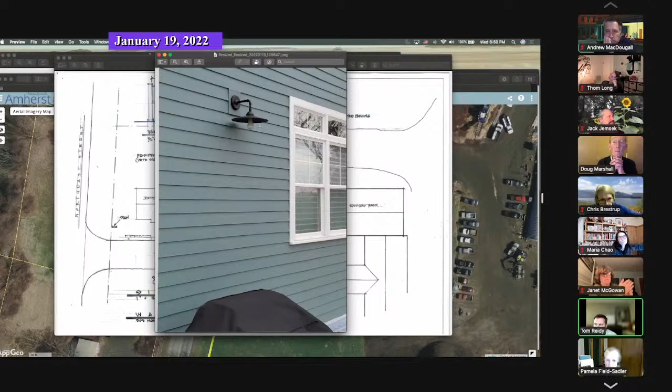Let me get to, so here's the floor plan.

Existing barn here. If you were at the site visit, you saw those barn doors. And so there's a question about, well, where is this going to start? And so it starts, there was a window on the barn. It'll start just to the right of that window or to the left of these barn doors.

They still utilize this barn, and so they would need to have access and be able to open those barn doors. The footprint, if you'll remember that L shape, you've got that entrance that we talked about here. That will be at grade, so it'll be accessible.

You've got the retail area here. You've got the coolers along this northerly side, the left side in the plan. You've got your checkout area here.

Stairs not accessible to the public because there's no public spaces. There's no public bathroom. So really the public is only going to have access to this area right in here. There's that porch. If you recall, you saw those steps with that porch light. There's the porch. There's a doorway into this open area with a hallway.

And then you've got 3 offices, 100 square feet each, to be used for the existing agricultural uses on the property.

So Wagner Wood obviously operates at this site. They also have an office in their house. They'd like to keep that office. Buzzy and Jamie have 5 kids.

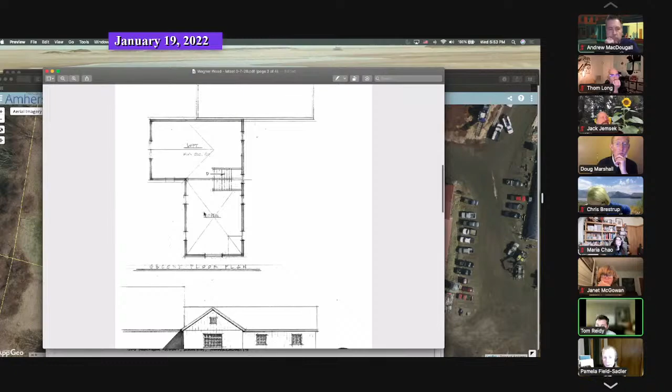You'll see the porch, you see the loft area, that second floor, which again is just going to be for storage. So this is just a second floor. It's open above, so it'll appear as a 2-story open space. When you're walking to the farm stand, you'll have the roof 2 stories above, and then that loft is over where the offices are. This is looking from the northerly side.

It's not shown, but there is that porch right over here. You see that the grade slopes off. Ultimately what we'll have is an access into the basement, because that's where the Wagners are going to store their freezers.

And I probably should say, because it's most important at least at this time, we'll comply with the bylaw, and we'd accept the condition that we comply with the language of the bylaw as it's written. The intent is to have 100% of the products from on site. So they raise cattle, and the idea would be to send that cattle out and then bring the cattle byproduct, the meat, back for sale at the farm stand.

They'd like the ability in the future maybe to get complementary produce that's not grown on site, but is from Massachusetts. So they'll comply with the bylaw, just so you know the intent right now is to just sell the wares from the farm at the site.

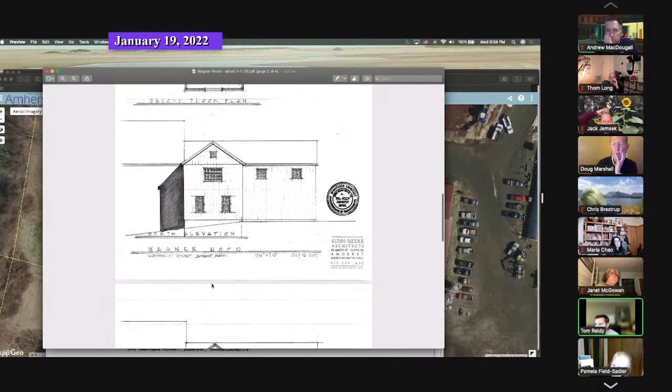Oh, there you go. There's the north elevation with that porch, which is the right way to look at it. And then you've got that south elevation. This is the existing barn.

Here's that other side of that entry, if you'll recall. And it's a 2-story in appearance from that side.

And then just to go back, the wood sign, Wagner's Farm Stand, right here, 4x2, so 8 square feet is what this would be, and it's proposed to be right here.

We're also thinking about putting a safety sign, caution pedestrian traffic, in about this area. We're happy to update the plans. And then I guess if that's deemed as exceeding the square footage for the signage, I'm not sure that safety signs are like traffic or informational signs are - I'd have to frankly look into it in the bylaw. Assuming it is, then we'd request a waiver from Article 8 for the ability to put in that additional safety sign. If it's not, then we'd just like to put in that safety sign.

There are trucks that travel through this path. Most of them are Wagner's trucks, or they're folks who come here often to pick up the mulch or to drop off other tree products. So a lot of the times it's people who know, and they'll certainly let people who are coming know, and let their drivers know there could be pedestrian traffic.

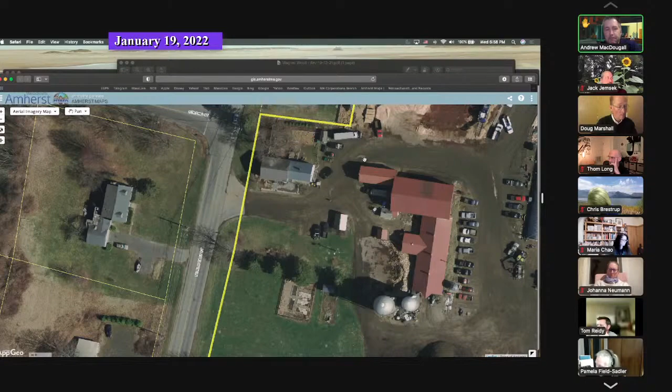We had some questions which were related to traffic flow. So we asked about how the large vehicles and trucks get through, who drives those trucks, and some general safety questions, which Tom alluded to in his presentation, that the truck deliveries are generally aware of the situation, given the fact that Buzzy and his family have 5 kids. Traffic moves through slowly, but they acknowledged that it would be useful to put up a sign, as Tom already alluded to. We did have some questions relative to ADA access.

So the existing kind of paved material, I can't remember what we decided to call it, whether or not that was going to be changed. It was shared with us that the surface would remain as it is. It's generally flat. The distance line from the ADA spot to the front entrance is generally level. As you saw in some of the elevation views, as you wrap around the north of the building, the elevation does drop, but they have acknowledged the need for ADA parking. There will be a designated spot, and also it was indicated that given the nature of the area, it's quite possible that somebody who has difficulty moving around might just park close to the building anyway, so they could get quick access.

The lights on the house were pointed out, and the motion sensor lights, and then there was also the indication that there will be some lights on that post that Tom just pointed to, and also that there would be coach lights on the side of the building as well. There's a couple existing structures, I think actually one existing temporary structure that's moved around, that's in kind of the shadow line of the barn there now, but I think that was about it.

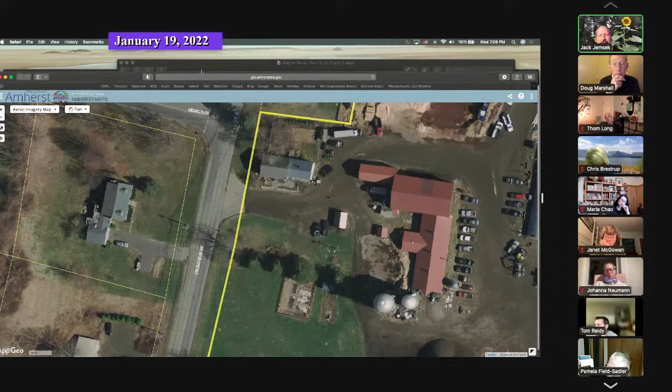I had about three things I wanted to talk about, but the ADA — people have asked a bunch of questions — but one thing I'm not clear on is the access to the building, because I know there's stairs. Is there a wheelchair accessible entrance to the building? Where is that?

Pull this back up, Jack, if you can see — I'll show you this. These are stairs over here, so that's not the public access point. If you follow it, it's in the southeasterly corner of the building — I'll go back to the site plan, or the aerial, really. So it's in this corner. All right, and so it'll be right over here.

So that's why when we talked about the accessible route, it's relatively flat, basically flat, from these parking spaces to have van access over to this corner. But what we just talked about with Janet was putting something right here, potentially an ADA parking space. This is where there's a bit of a slope, plus they need access to that barn, so this space probably makes the most sense. The entryway here will be at grade with the surrounding area.

Thank you, Tom. The second question is about the surface of the drive and parking, given the size of the trucks that come in and out. How often does Wagner have to resurface, bringing in additional milling material and planing and that sort of thing? Because I thought the trucks were pretty large there. It would tear up

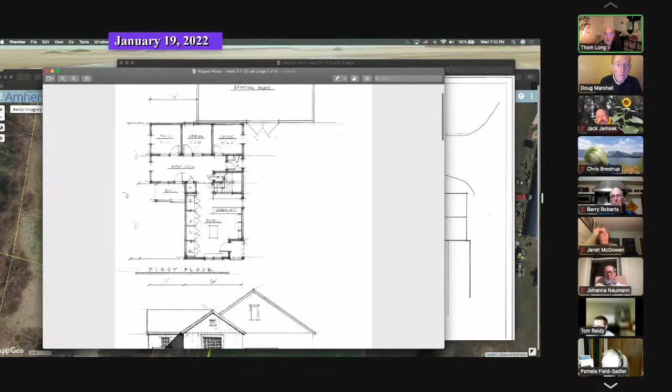And so, but if people are being employed there, don't they need to be accessible? You would need to hire for accessible people, or for people who need access, right? Yeah, and I don't even want to go down the road of thinking about discrimination and reasonable accommodations, et cetera.

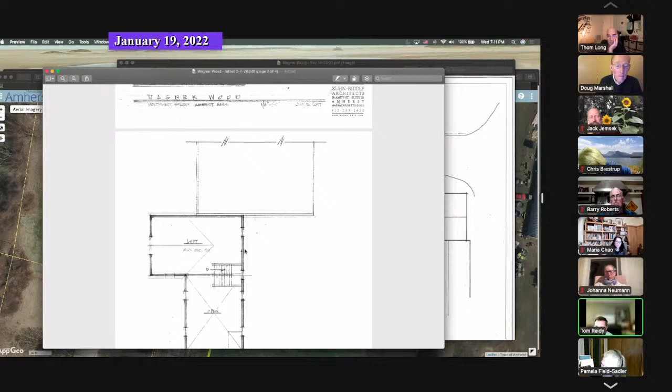There would be the ability to access these offices through this door. This second floor, as I understand it, is for storage. Again, not to go down that road, but I would imagine that any employee who is not able to go up to the second floor would not be required to. I don't know, Barry, if you've got this, but this is what our architect tells us as far as what the accessibility code requires. Sure, it was just a question and a thought. Thanks.

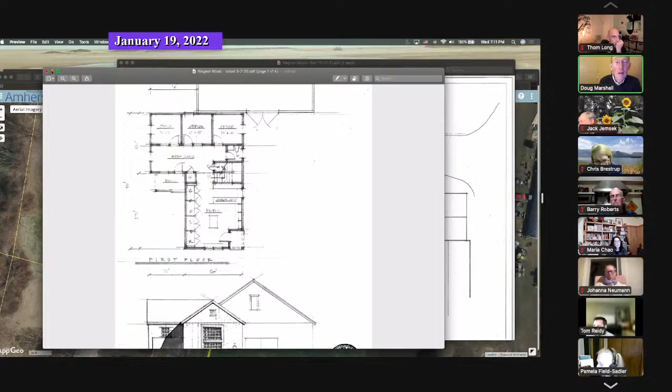All right, I guess I had a couple of questions. One is, and this is really I'm just curious, what Barry's role is in this. I understand, Tom, you're the legal counsel, and is Barry in partnership with the Wagners or something? I am not in partnership with the Wagners, I'm just helping facilitate the build and working with John Kuhn to design the project. Okay, thank you, middleman I guess.

And then I guess it was a question for Chris, how this commercial use fits in with the zoning of the farm, of the agricultural land. And by approving this, what happens if this grows and becomes successful and turns into something of the scale of the Atkins farm shop in South Amherst? You want me to answer that? Sure, yep.

So they need to adhere to the requirements of the Class 1 farm stand, which requires that 25% of the products they're selling be grown on the site, and that 50% be grown in Massachusetts. They can find other products that are compatible to fill up the rest. The building commissioner is going to ask for proof of what they're selling, and we'll be checking periodically to make sure they comply with those requirements.

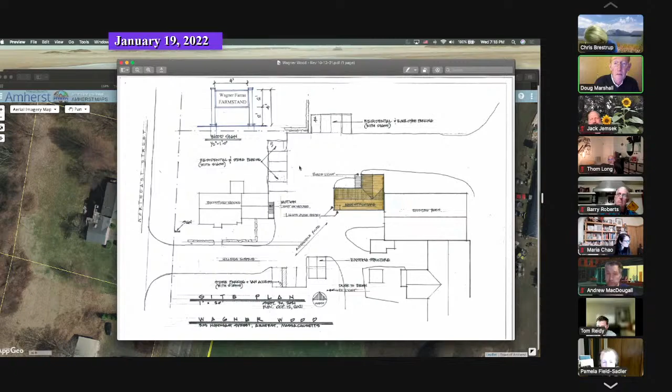Are there any more board comments or questions? At this time, I will ask for any public comments on this project. I guess I don't see any. Chris, I assume that abutters were notified that this hearing was going to be taking place? Yes, they were. Okay, so I don't see any public comments.

All right, any final comments from the board? Does anybody want to make a motion? Johanna, go ahead.

Well, I guess I'll just say it seems, you know, it's a huge property overall. The idea that they're going to start selling some of the meat that they produce locally on the farm just seems cool. It's consistent with the historic usage of that land and kind of making it possible for people who live in Amherst to be even more connected to the food and the farms that operate here. I recognize that's a little bit outside our job, which is to look at lighting and surfaces and structures, but overall, I think it has the potential to be a neat feature and addition to our community.

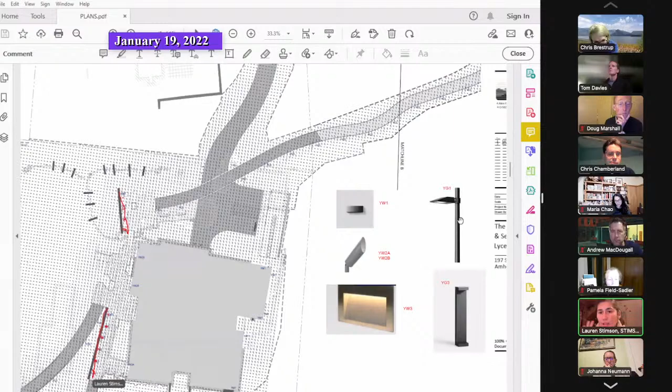And then there is a third type of lighting, which is wall lighting - flush mounted wall lighting. These are two seat walls that hold up the terrace at the edge of the building and define that front terrace, and those would be flush mounted wall lights. And then the fourth, or really fifth, type is coming off the building.

These are actually building mounted lights. The architect can talk about them further if there are questions.

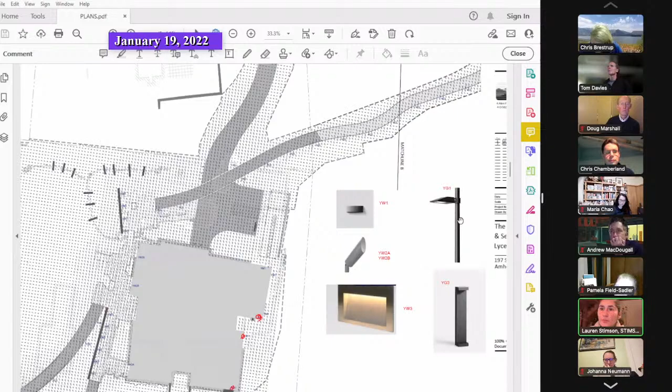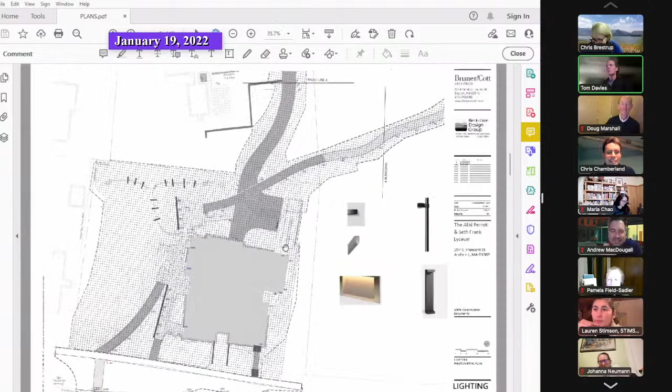Can I just add one thing before you zoom too far out? People probably know this, but all the notifications went out to the abutters and they all came to us because we are the abutters - we got a big pile of them. Presumably you didn't have any issues?

Looking at site utilities, we will be replacing the existing utility connections onto the site as they're sized for a single family home and need to be increased. Water service will come directly off South Pleasant Street. Sanitary service will discharge to Walnut Street, then run south through new sewer. Site electrical and communications will come off Woodside, underground, coming off a pole, and then underground along this driveway up to the main site. There's no gas - the college is moving away from fossil fuels everywhere, so this is pretty much an all-electric building. Those are the connections we have to deal with.

Then there's the stormwater management overall on the Lyceum site. The drainage from the roof of the building and some of these hard surfaces is a combination of piped and overland flow, which we worked closely with Stimson to create a series of bioswales and rain gardens. There's a lot of slope to deal with on this site, especially once we've created a flattened terrace area. So there's going to be a series of logs designed almost as steps to bring this water down on the surface, allowing little pools for settling, temperature attenuation, and those sorts of things as we exit the site. If you're up for a walk on a rainy day, it should actually be a nice dynamic site feature.

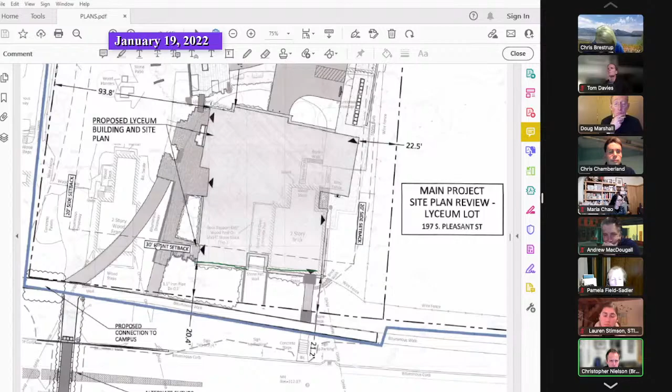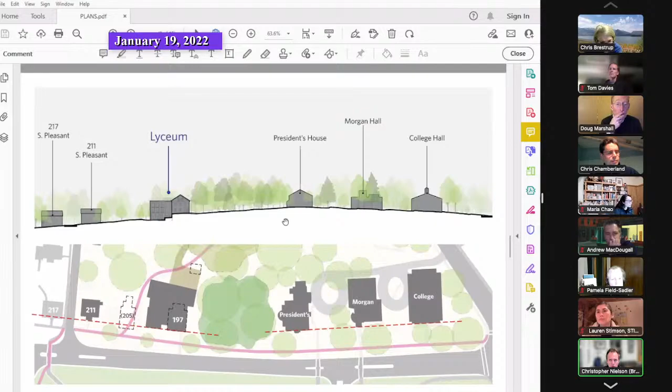Down below, we look in plan. We did a study to look at what is the actual setback of these buildings and where could we be most respectful of the neighborhood in our addition to 197 South Pleasant Street. Chris, there's one more image. And so in the end, what we think we've come up with is a building that reflects the scale of the existing building and a bit of the rhythm of the windows, while still maintaining an institutional academic building for the college.

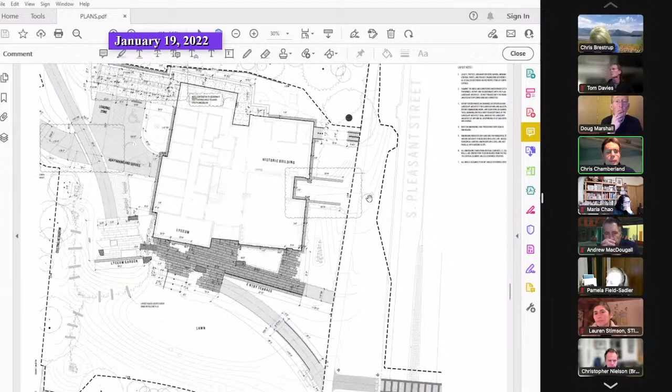Thanks, Chris. Sorry, I'm going to have to jump back a little bit because the last part I want to talk about is the Newport House lot over here. We touched on most of the main points here, but just sort of pause on this as a separate site plan review. This is an existing nonprofit educational use. There is no change proposed to that use.

Previously, this building had some classroom and meeting space. At present, it's entirely a dorm. The proposed work includes stormwater management, lighting, as well as a small amount of planting.

The lighting is consistent with the overall lighting plan which Lauren stepped you through. There is a proposal to add a small amount of planting at this intersection of the woodland path with the parking lot, which also highlights this ADA crossing as we get from the path and the ADA parking spaces into the building.

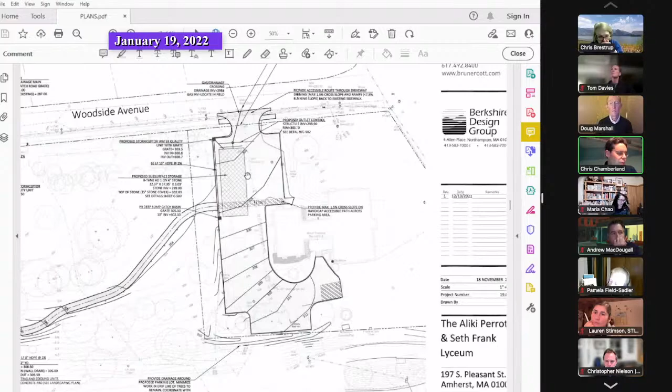Questions came up about the traffic associated with this parking lot. What we want to highlight is that as part of the overall campus parking supply, these are spaces typically used with turnover of once or twice a day as people arrive to campus and then circulate around campus primarily as pedestrians before leaving at a single time. So those are the key points we wanted to highlight. I'll keep these plans up, but we're more than happy to address any questions you may have.

All right, thank you, Chris, and your entire team. That was a nice presentation.

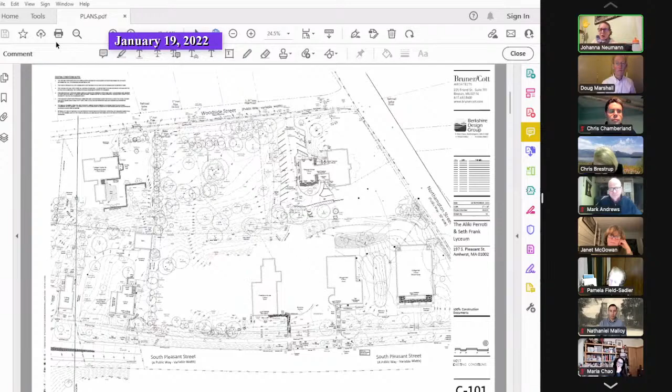We did spend a little bit of time talking about the different grades, downhill, looking over at the Amherst College campus and the connection with footpaths there. It was noted that the new woodland path would have undulations, but overall doesn't have quite the same challenges with grade as some of the more paths towards South Pleasant Street.

We also talked a bit about the building which is planned to be used as an office along Walnut Avenue, and that would just return to being a dorm. So it wouldn't be really disruptive to anybody there with the construction and things like that. It was kind of a short visit. We were really cold.

Okay, great. I'll assume, Andrew, you don't want to add anything? No, I was going to just mention the staging of that house. I think that was something addressed in the plan as well, whether they'd be able to use that as an office instead of having to bring a trailer on.

I think, Janet, you had asked about geothermal, in terms of whether that would be considered at the site, and it was shared that was not in consideration. But otherwise, I think it was a great summary, and it was cold. It was really cold.

All right, so board members, any questions for our team from Amherst College? Maria.

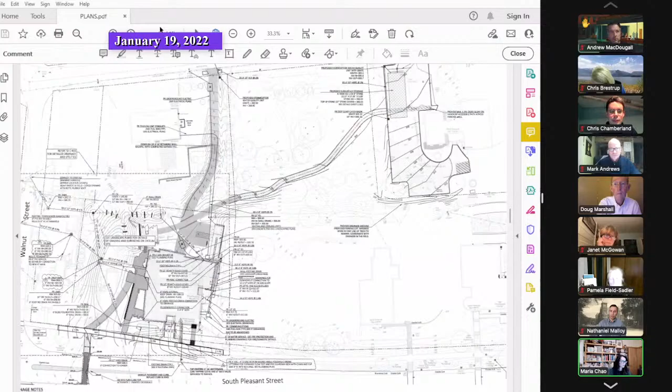I think the setbacks are not an issue in my mind, that it really fits with the scale of the street and adjacent buildings. The 3D renderings, not that we'd ever be 80 feet up in the sky, but I think it's really lovely the way it respects the adjacent building.

I think also that the parking is not an issue in my mind. Just disclosure, my husband works for the college, and the staff and faculty park in one spot, and then it's a walking campus. They walk into town for coffee, they walk everywhere. So the parking in my mind is not like you need parking next to every building you're going to use. They literally walk for miles all over the place daily. So I think that's the way this building will function as well.

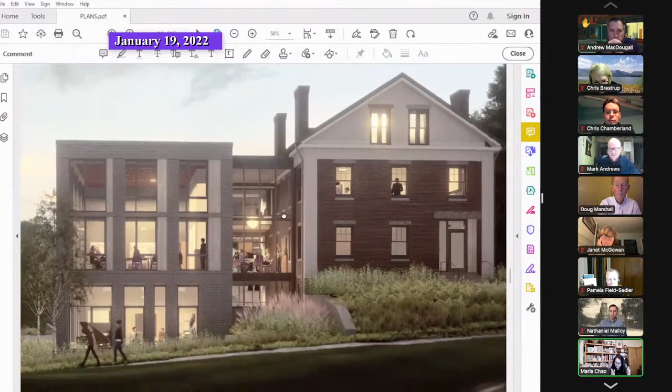And I think the entries, it's hard to see from the rendering, how clear the entries will be, but I think in reality it'll be obvious with that glassy centerpiece. But some of the landscape, it's kind of hard to see exactly where people come into this corner of the building. But I think once the reality of it is in the space, it'll be clear where the circulation is.

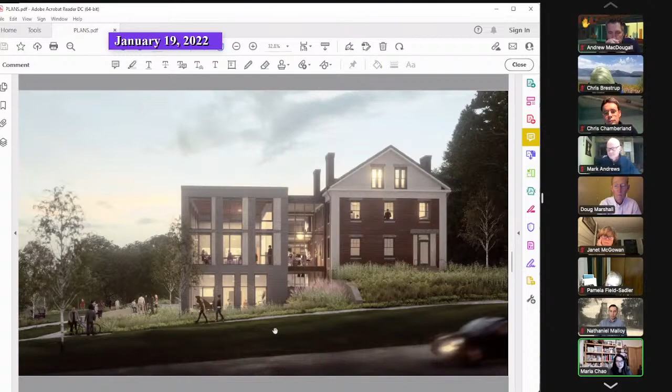I do have a little concern about that huge retaining wall. We see the renderings, we see these plans and elevations, and then suddenly when it gets built, I'm like, oh my gosh, did we approve an 8-foot retaining wall? Like what's being built on the corner of University, I didn't realize there was this huge retaining wall that was going to be the first thing you see. This is really nicely masked with what you have right now with the landscaping, but there will be a railing at the top of that huge retaining wall, I imagine. Hopefully the landscaping will hide that, and no one will wander there because there's no sidewalk or anything.

But I guess my only question is, in the plan it shows a few seminar rooms and larger meeting spaces and think tanks. Will any of those be used after hours, after the normal school day? Not that things close down, but will that be accessed beyond dark? Is it only for like 9 to 5, or will there be events or any kind of larger gatherings after dark in those larger spaces? I'm not sure who would answer that exactly, but just putting that question out there. Otherwise, I love the building. I'm really excited. I can't wait to see it in reality.

I'm happy to answer the question about the schedule, the functioning. So there are two things that we would anticipate happening after hours. The first is just students using the building, kind of like they do the Science Center now, as a place to hang out and study. There's really nice open study space. The classrooms, seminar rooms will be available to them through card swipe access to be able to use those for group work and that type of thing.

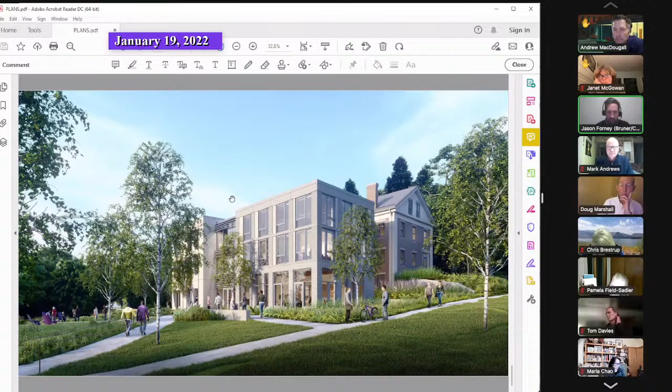I would be happy to do that. I'm Jason Forney, principal with Bruner/Cott Architects. It's always been our approach to think about the two pieces of this design working together on South Pleasant Street, one new and one old, having a conversation with each other. A lot of those approaches are good preservation practices when dealing with old buildings. Clearly the new building is below the eave of the existing one, in which way it defers to it. We think of them as compatible, but still clearly distinct, because that allows the old building to kind of shine and be itself, and the new building to be something different.

And so there are a lot of regulating lines and window sizes and shapes, as well as the materials. This is a stone building, and we worked hard to think about how each side of this composition, of this conversation, is speaking with each other, so that it looks and feels the way that it does. Another important element is what we call a sort of hyphen in the middle, which is more transparent, that allows them to not be too close to each other, have a relaxed meeting there in the middle. So it was intentional to be distinct but compatible.

Okay, thanks for that answer. I will say, in this view you can see the distinction, but for most people driving up and down the road, you probably won't. Because if you're driving southbound, that house, the brick side, is kind of hidden as you're coming from the south into town. I don't know that you'll actually see much of the brick building at all, but again, I think it's a beautiful building, so no complaints.

A couple other real quick ones: there was a page in our packet that talked about subcontractor parking, which was way far away. I'm curious, is that where the people actually working on the building are going to be parking, past the tennis courts and almost on Southeast Street? Is that the case?

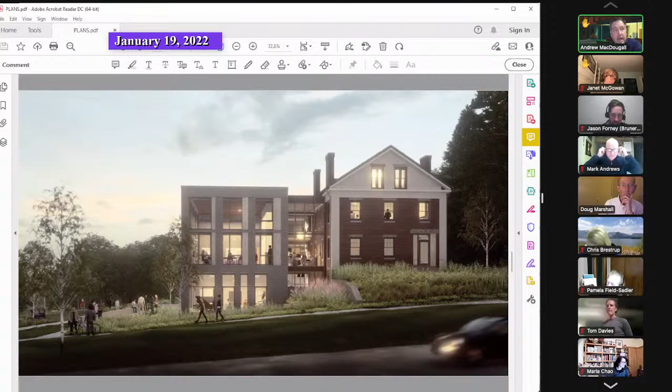The sidewalk, I know you mentioned that was out of scope for discussion today, but I did want to point out yesterday it was very icy. It won't be every day for sure, but the nature of this current sidewalk crossing being on the south side of Walnut, this was explained very well to us yesterday. As you cross, it goes down and that goes down, and I was in a walking boot yesterday, and it was icy and kind of tough to manage, and someone almost fell trying to cross as well. So just a vote to try to get that crossing set up whenever you can. I think it'll make it much safer for somebody who is having trouble walking around.

And then I guess the other thing, just the status of using that house as a construction office. Has that been approved, or is that something still under consideration, or I just don't remember what the status is.

I can speak to that if you want, Tom. I had conversations with DOC today to get an update for our meeting. They're still talking to Amherst Inspection Services, but we anticipate approval pretty quickly. Everything looks like it's falling into place. Great, thanks Mark. That was all my questions and comments.

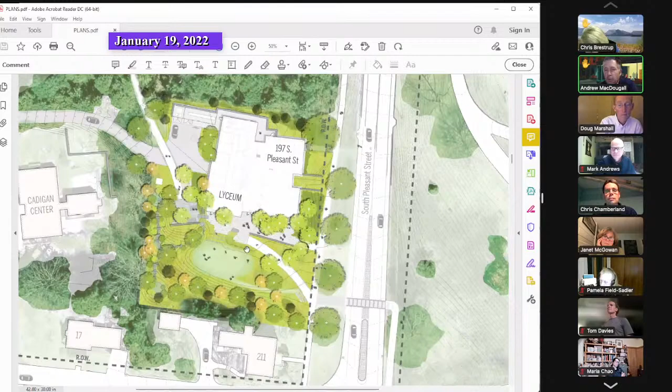Yeah, I mean, I think from a consistency perspective, the street front with the street trees will maintain a consistent feel along South Pleasant Street. And I think the nature of the oval, being like 50 or 60 feet off the street, off the sidewalk, means it's going to feel like something that's part of the Lyceum and not part of the streetscape. I think it's done quite well—the garden looks really good.

I was just thinking about along the street with the grasses in front of the buildings—this is the grasses that were disguising the big retaining wall. Yeah, part of it looks like you're landscaping for low maintenance, things you don't have to trim every 15 minutes. But I just wondered if it seems too different—though the entire garden swale area seems beautiful to me also.

Yeah, I mean, I would say also currently in front of 197 there's kind of tall grasses already. The existing conditions are already similar to that.

Okay, thank you, Janet. Chris Brestrup? You're calling on me to comment on the planting? Yeah, you have your hand up. Oh, I'm sorry, I don't—I didn't mean to. That's okay, legacy. All right, so Andrew, we're back to you.

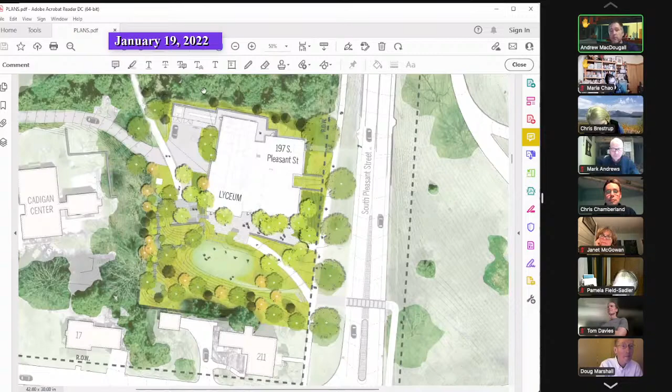I had different questions. Did the panel or did folks want to answer Janet's first? Okay, yeah. So regarding the ADAs, the number of spaces, the number of total parking spaces.

I'll put in two points, then defer to Lauren in terms of what's feasible on the site. In the development report—and I think this was reflected in the application—we note that we need a waiver for parking, so that is accounted for. I agree that is something the board needs to take action on. If there were 45 spaces provided, my memory of the code, which is always a dangerous thing, would be that there'd be 2 ADA spaces required associated with that.

Thank you. Could you put those 2 spaces close to the building, maybe where the trees are? Or could we configure that?

I'd like to talk to parking in general, because I think it's difficult to conceptualize the fact that this is a building on a college campus, as opposed to talking about this building in isolation. So it's tough to zoom out.

We've talked about the fact that the parking facility for the campus is all of the parking on the campus—there is no designation, no sense that people coming to this building are going to park in a certain area. It is a system with hundreds and hundreds of parking spaces distributed around. To the south of this, there's a large lot at the athletics area, which wraps all around the athletics drive. There are also a number of lots larger than the one at Newport scattered up around north of this building.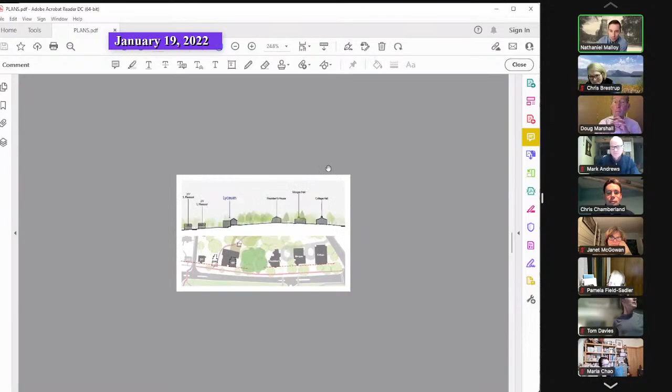No, I think there's 5 types of lighting. There's pole lights, which according to the spec sheets were almost 20 feet tall.

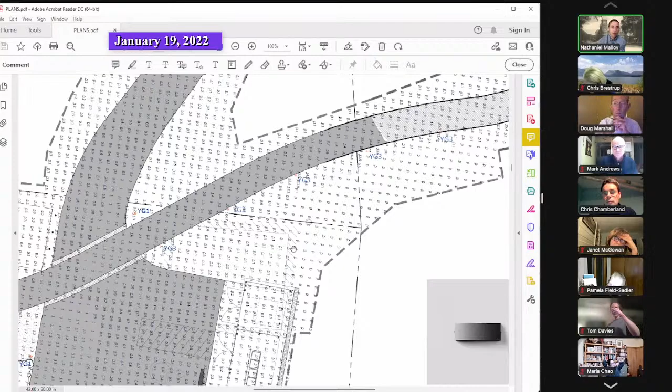There's wall lighting, like Lauren mentioned, and then there's building lighting, and bollards along the walkways. I think it's a low light scheme, so nothing's too bright. The lighting along the path meets standards for a garden walk or walkways. This isn't a high residential or urban street. So along the South Plaza, along the building, those two main walkways leading up to it, it's well lit. It's not as well lit in the South Lawn. So for functions at night, the lighting is really on circulation paths and along the building to illuminate the building, and probably for security reasons.

I think it's a respectful lighting plan, so it's not a glaring lighting plan. It's not that the whole site is illuminated at night. It's not in the urban core of the campus or in a downtown. So right along that south entrance and those walkways, the lighting, the lumens shown here, the numbers meet the standards of lighting.

All right, thanks, Nate. Chris, Chamberland, did you want to add anything?

I don't think we have too much to add. I know that Christopher from Bruner/Cott circled back with our lighting consultant to verify a few of the questions that came through Nate's comments. I think he summarized it really well. There's a tendency to think that more light is better sometimes for safety, but when you talk about glare and certain settings in the existing condition, low light, just enough light, is typically better than too much. And that's what we've really gone for.

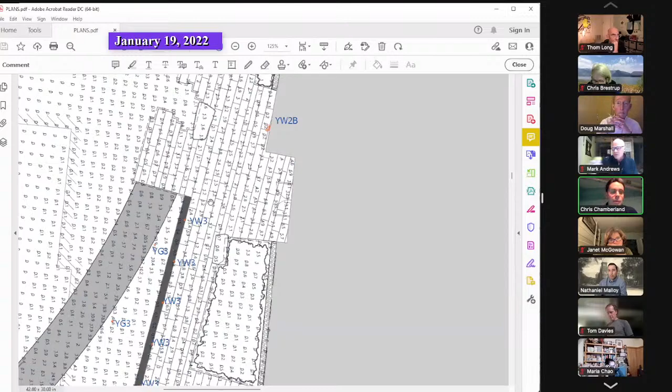I admit it's hard to see on the electronic version, but it is possible to zoom in and get a better view of some of these numbers. Generally speaking, those paths are seeing, as you can see here—this is pretty representative—values mostly clustered around 1 and 2 foot candles on the site.

All right, thank you. Thom.

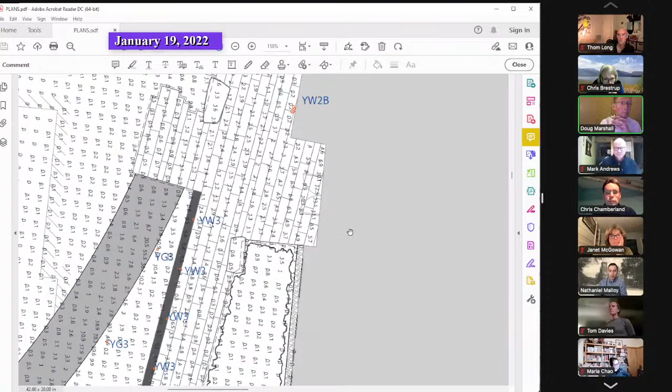Long. Thanks, Doug. And thanks, guys, for your presentation. I think a lot of my questions were already asked, but I just wanted to chime in on a couple of things really quick.

One is that I think the aesthetic is right on with what Amherst has been doing over the years in terms of keeping their architecture in a contemporary fashion for that time, but in a nice pairing with its history and the historic buildings on the site. So I appreciate where this building is coming from and where it's headed. I also wanted to comment that I support the waiver on the setback. I think having that building flush with the existing building is the appropriate thing to do in this particular case. I think it does help reinforce that street front, and I'm okay with that revision.

In terms of parking, I did teach at Amherst for about 10 years, and you just kind of park somewhere and then walk to whatever's the closest building. You have guests come all the time, you send them a campus map, and tell them that spot's the closest if you can find one, but otherwise you'll find your way. But I do hear you in terms of accessibility, Janet. I do see that there's one spot and then there's a drop off, so there is the possibility that if someone is with another person, they can be dropped off at that location and the car can be parked elsewhere. So I think that's adequate for the particular purposes on the site as well.

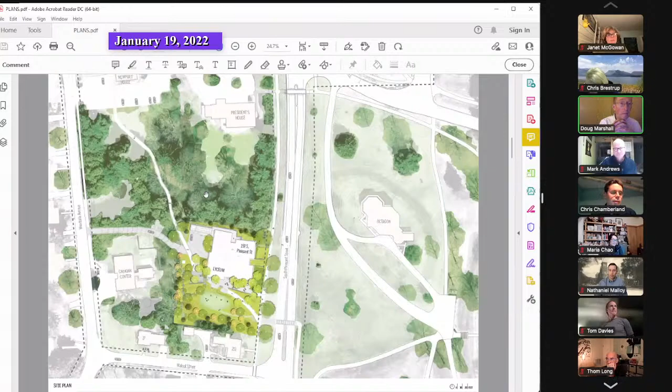So getting back to handicap spaces, is there space in that back area that you could put another space if you move things around? Because I do see the 3 trees or shrubs planted there, and I know you have some dumpsters and things like that, but I do think it's not really accessible if someone has to drop you off. There has to be someone to drop you off and then find a parking space. I'd just like to see 2 spaces there. It looks like there's space to me because I'm looking at some plantings, and I wondered, could you do that? Could you fit that in there if you move the plantings or things around a little bit? Not if you want to, but could you do that?

Is that a question for Lauren? Tom, is that okay if I answer this?

It's a little bit difficult, Janet, only because we need this turnaround. I'm just going to draw here. It's a little bit difficult in this location, we'd have to study it further, but you need this turnaround so when the car pulls in, it can turn around to get out. So it's not as easy as just putting another space here and paving this, because there's no place for it to turn around, the car would have to back all the way down. I think it's a really good point and I think we will certainly talk further about this. But to answer your question, it's not as simple as just paving that location.

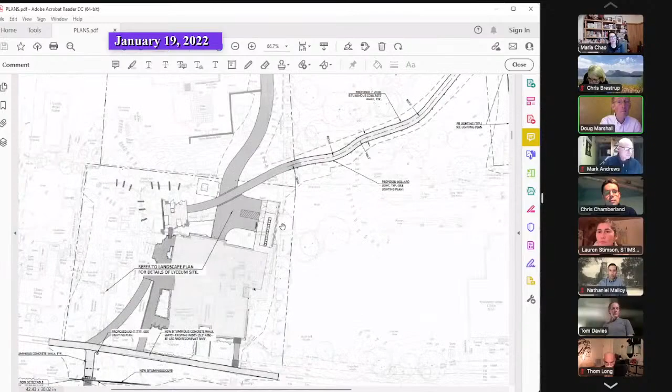So I think this was brought up a while ago, maybe the last time Tom Davies was at the planning board meeting, where we were saying could we one day relook at all the college properties and think about what currently is in RG should go over to ED? Because it's been like that for decades. And maybe it was you, Doug, that brought that up, and I remember Tom jumped on it. The 44 parking spaces or however many spaces requirement is because of an antiquated zoning that's just been around, and the college has grown into the adjacent zone.

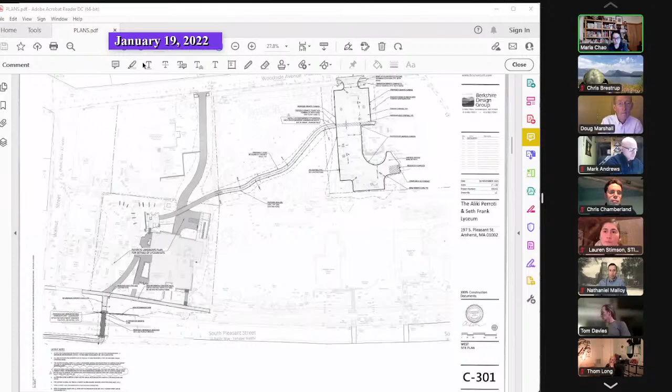To use that as the number to go by to figure out the number of parking spaces, the number of ADA spaces seems outdated, because this is an ED building in an RG zone. The zone doesn't really match what the use of that parcel has been for the last, I don't know how many decades. So I feel like that conversation is not really the right big picture conversation to have. I think it's more like, how is this building used, how will it be used, and are things provided that take into account those possible scenarios.

I personally don't think that we need two ADA spaces right up against the building when that property is already very tight. They've done so much work with the grading and getting all the site slopes to work with the entrances. As far as people and cars, I feel like more paving is not the right direction for this project. Maybe it'll come to me, I forgot what my other point was from an earlier question, but that's all right.

I guess I'm going to make one comment about that, and I don't think I would use the RG requirement as the basis for that conversation.

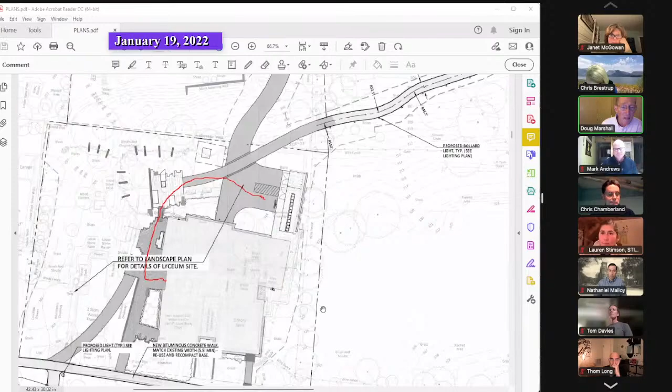Well, let's see, not seeing other hands, I'm gonna just ask a few questions. Could somebody draw on this plan what the route is from the accessible spot on the west side of the building to the nearest accessible entry? Is it around the south side of the building or the west side? Perfect. Okay, so that's the distance that's probably less than 200 feet. And I haven't opened up my packet to see, is there a door at the hammerhead there on the west side of the building? So there's no entry there.

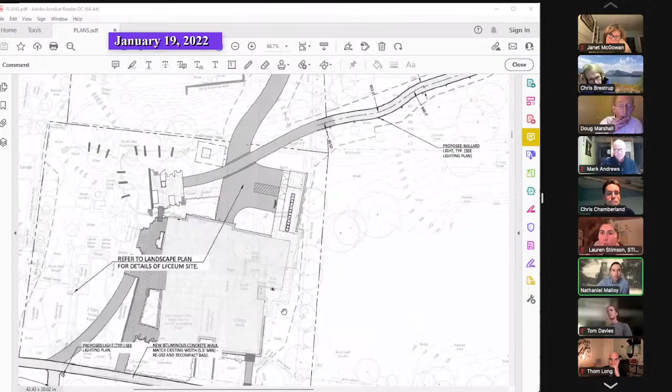Okay, Doug, quickly on the plans, you'll see on the concrete ramp there is a door on the west side. It's probably exit only because there's a landing inside. Right where the cursor is, there's a door, and then there's a service entrance on the north side. So if you look at the plan, there are entries, but they're not for visitors or students or anything.

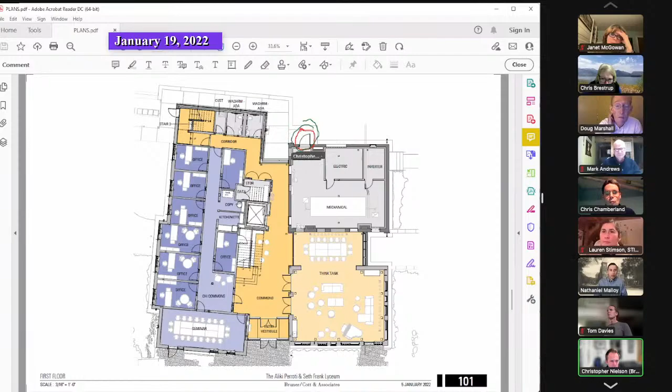I can speak to this briefly. The one I'm circling right now is for access to the mechanical room, which is actually at a different level than the first floor. Then there's another one at the bottom of stair 2, and this is egress only, exit only. On this plan, north is up, which is rotated from the site plans. So the exit from stair 2 is on the west side of the building.

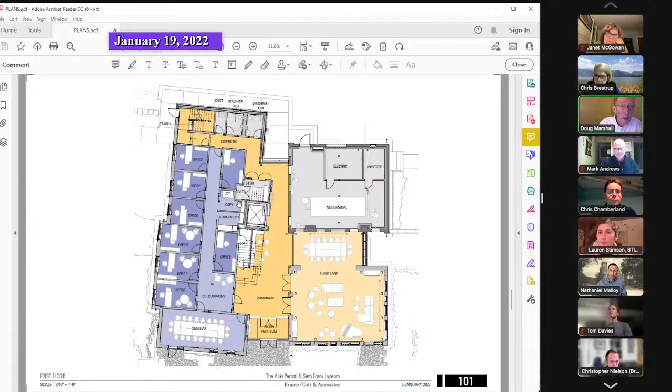Has this project needed historic commission review, and did it receive it? Chris Brestrup: Yes, this did receive historic commission review. There was an addition to the existing brick building on the south side, and also an addition on the west side. The historical commission looked at the removal of both of those items, and also talked to the applicant about the proposed plan, so the historical commission is aware of this proposal and has approved the removal of those two additions to the building. I'm not sure what the conversation was about changes to the facade on the west and south side, but perhaps Tom Davies or Chris Chamberland could talk about that.

Okay, Tom or Chris, either of you want to say anything? I'm sorry, I didn't catch the question. Chris, could you repeat that? Yeah, the question is, did Amherst College talk to the historical commission about, in addition to removing the white structures on the south and west side of the building, did you talk to the Historical Commission about changes to the facade of the existing building? In other words, the brick facades on the south and west sides, and what was that conversation like?

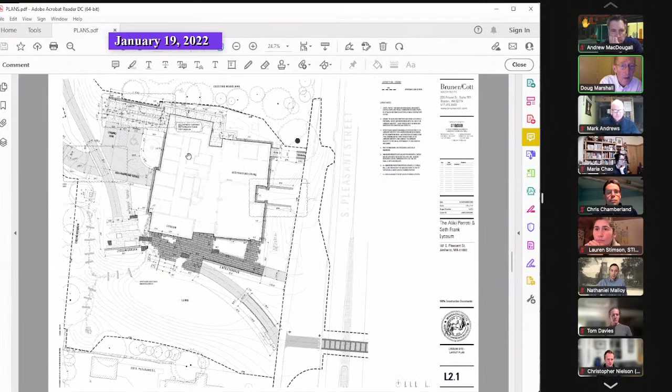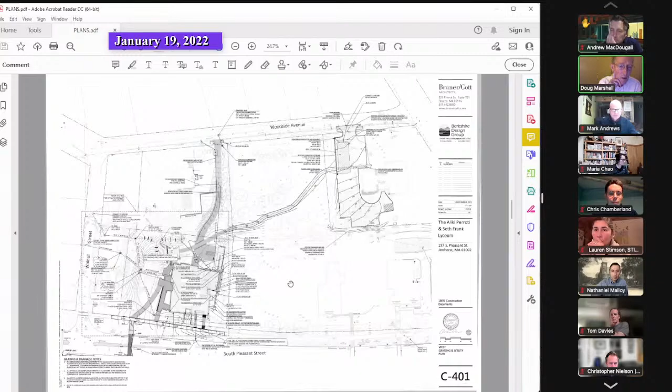All right, great. So my next question had to do with the stormwater as dealt with on the Lyceum site. I know in Chris Chamberland's summary, you mentioned that some of the stormwater provisions up at the north end were compensating, let's say, for the work that's happening down at the south end around the Lyceum. But since I think the slope is to the south off of the Lyceum site, I just wanted to be sure you're confident that we're not going to be creating new runoff issues toward Walnut Street.

Maybe Chris Chamberland, do you have any comment about the stormwater design for the southern part? Yeah, I started to answer and then realized I was on mute, sorry.

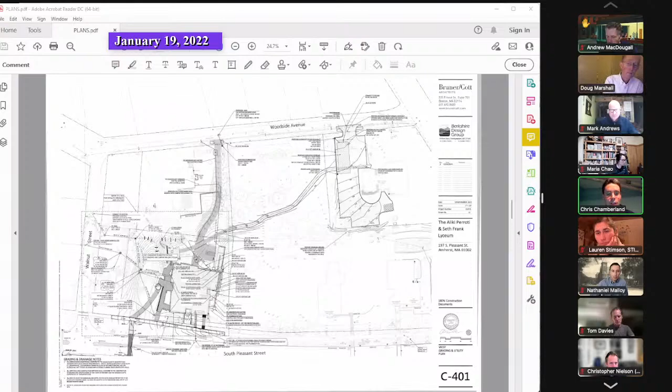Oh, good. All right. Yes, and I'll note that while there is an increase in impervious area in the core site, replacing 2 houses, a driveway, and a barn, it's not as much as you would think looking at this site. But yes, we did look at concerns on the distribution of stormwater between Walnut and Woodside, and noted those in our submission to DPW, and it's comparable enough that we're not concerned. The storm drains in both of these streets do meet up very quickly at this intersection. And I'll just note that there were no concerns on DPW's part in their comments on it.

Okay. All right, so at the worst, your abutter can take care of that problem. Yes. Okay, and then I guess I'm just interested in the rationale on the expansion of the parking lot.

At the north end, I'm forgetting the name of that parcel, but if you're saying there's no net demand increase for the campus because the people that are going to work in this new building are already working on campus, but you are increasing the size of your built footprint of your space on campus, and presumably the people that are going to move into this building are going to be vacating space somewhere else on campus, which might receive new people. So I'm curious, why was this the time to expand this parking lot if in fact there's really no change in demand?

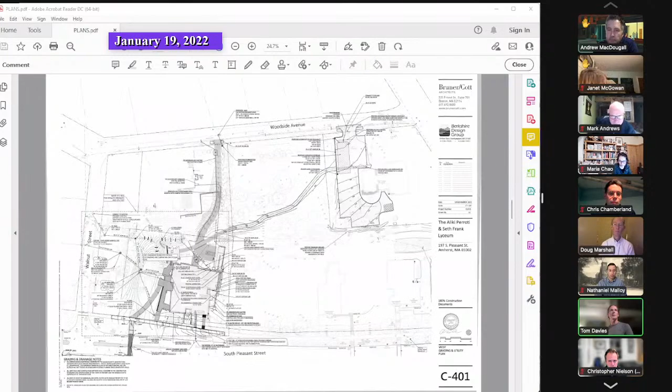But the issue of accessibility from the rest of the campus—first of all, we are creating an accessible pathway that adds to our overall network. We didn't talk about this because it's not part of this purview here, but it kind of runs along the side of the athletics loop drive and connects in with the rest of the accessible pathways.

Okay, it's coming up here. You're still on my screen anyway. You're pointing to something you're not needing to point to, but okay, now it's catching up.

So connecting to the whole accessible network pathway to get someone with mobility impairments to South Pleasant Street and to that crosswalk, all along accessible pathways from the rest of the campus.

Now, the way that things work is that municipal sidewalks don't have the same requirements of accessibility—you probably all know that. And so there is a little situation there where at that crossing it kind of goes down and then comes back up again. We started to have conversations, and they haven't really moved very far yet, to try to improve that. The primary reason that we were looking for an additional crossing was to make a fully accessible pathway from the college's network of fully accessible pathways to the fully accessible pathways that we're building as part of this project. That was the primary motivator, not because we need another place to cross the road.

And the hope is that we can make, working with the town, some adjustments to the municipal sidewalk at that intersection for the existing crossing to improve it so that it is more accessible. Long-winded answer.

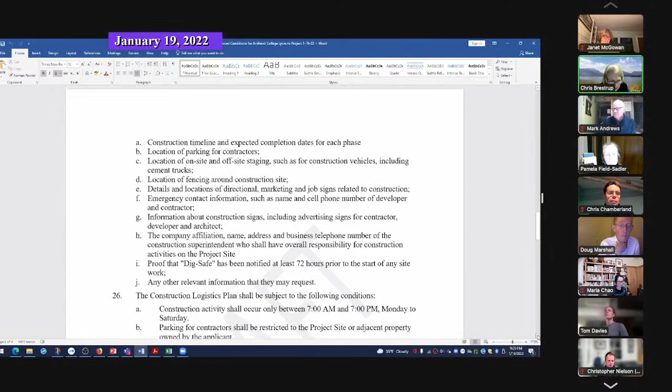Oh, here's 29. The project site shall be fenced during construction.

Do you want to say anything about signage on the construction fencing or other temporary construction signage? Often contractors put large, colorful signs on the fencing - we've seen that with some archipelago projects downtown. If you wanted control over that type of signage, this would be the place to put it - you'd ask for anything like that to come back to you for review and approval. But if you don't care to get into that, then just say the site should be fenced.

Okay, so that's a second topic we should come back to. Tom, do you want to comment on that now?

Just truth in advertising, there's already a sign that says DOC. It's probably 4 feet high and 6 feet wide on the fence to identify the site to vendors and suppliers.

All right, why don't we scroll through the rest of these and come back to this and the question about the crosswalk. Okay, so keep going, Pam.

Okay, so number 36 is just acknowledging that Amherst College is having ongoing conversations about use of 211 South Pleasant Street. You're saying that use of the adjacent property shall be subject to conditions provided in Article 14 temporary permit, and then we'd fill in whatever permit number the building commissioner granted for use of that property.

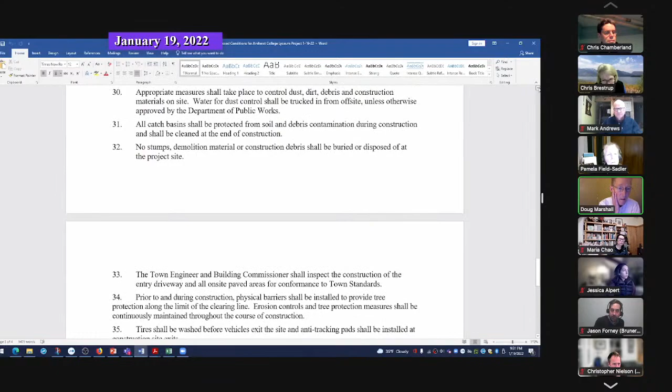It sounds like Amherst College would prefer not to - I mean, maybe 'prefer' isn't the right word, but at the moment you're not sure you're going to build that. So do you want Amherst College to come back and talk about these issues of access and safety if they definitely decide not to build that second crosswalk, or do you want it just left up to them?

Right. Janet? So I think this is a hard question, because it's about the use of the building and how people get to it safely.

And I wonder, if Amherst College is not going to ask for the crosswalk, we should talk about it and have a good plan in place. If they are going to ask for it, it still looks like a long ways - it's going to take a while to get to the town council and all that. So I feel like a bit of a dilemma, but I do think it sounds like they don't want to ask for it because it's too much of it, whatever. And I would have a lot of questions about the steepness from Walnut Street and crossing and where students would come in.

Because we did talk about that at the site visit, so I'm wondering what Amherst College is thinking. All right, thank you, Janet. Andrew?

I don't know if someone wants to answer Janet's question first, or - well, I was hoping to get the rest of the board's comments about this. No, fair enough. Yeah, I mean, I like this provision.

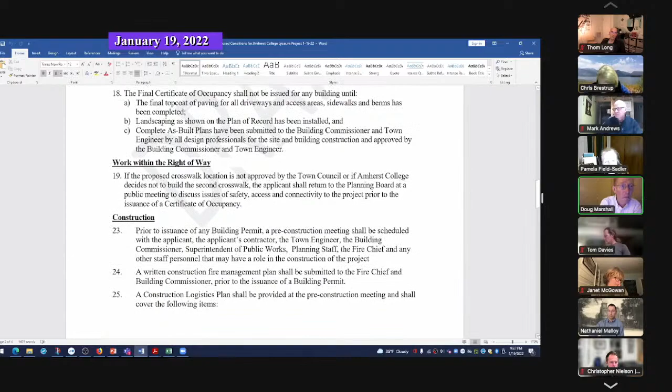Then we wanted to talk about the signage on the construction fence. Does anybody feel the need to dictate the characteristics of that signage at this time? I'm seeing Andrew shake his head no. Tom shakes his head no. Maria, no. And I'm probably a no. So Chris, I think we can remove the bracketed red text and just leave number 29 with the single sentence in black.

All right, so this was the conditions. Want to go through the findings for this building, the Lyceum? Is it realistic to think we're going to get through this tonight and approve everything and move on? Well, what you would have to do is go through the findings for the Lyceum, then go through the conditions—of which I don't have any—but I do have findings for the special permit related to the front setback. And then I have conditions for Newport House. Now, if you wanted to postpone this discussion to your next meeting, you have another meeting on February 2nd, so we could go through the remainder of these things then.

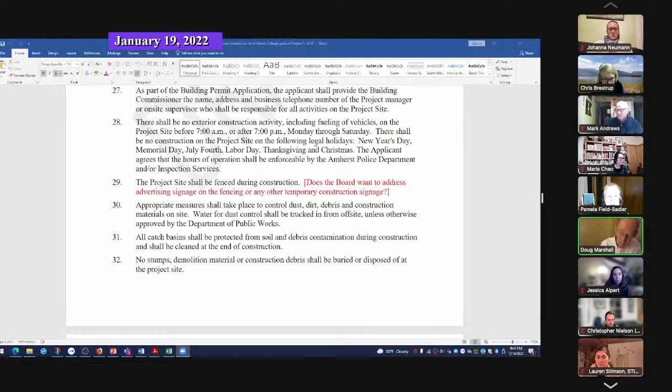All right, want to tackle the findings now? Yeah, let's go ahead to the findings. Okay, Pam, can you find the findings? Put them on the screen. Bear with me, let's see. I don't want these. Oops.

I want this. Proposed findings. Okay, are you looking at them? Yes, thank you, perfect. So these are the findings for the Lyceum project. The board found under section 11.24 of the zoning bylaw site plan review as follows. 11.2400, the project is in conformance with all appropriate provisions of the zoning bylaw.

The applicant has applied for a special permit to modify the front setback requirement under footnote A of table 3. 11.2401, town amenities and abutting properties will be protected through minimizing detrimental or offensive actions. The proposed academic use of the property as a location for the Center for Humanistic Inquiry and the History Department is unlikely to create detrimental or offensive actions and is expected to be a relatively quiet and unobtrusive use. Exterior lighting will be downcast and will not shine onto adjacent properties or streets.

11.2402, abutting properties will be protected from detrimental site characteristics resulting from the proposed use. Lights will be downcast and or shielded. 11.2403, provision of adequate recreational facilities, open space, and amenities has been addressed because the property is part of the Amherst College campus, where such amenities are readily available to the Amherst College community.

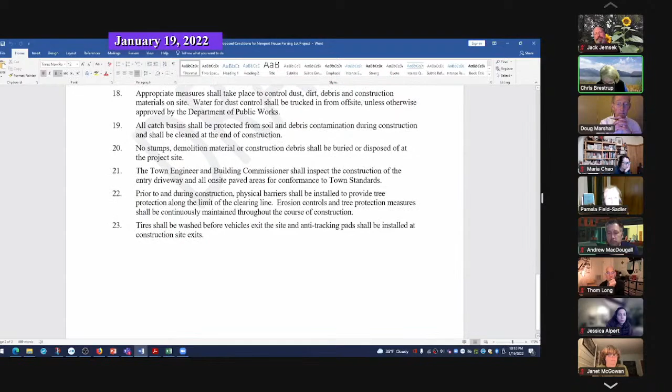Any objections from others? No? I don't think you need to review the other items. And number 21 is a duplicate of number 7.

So there are no additional conditions we've imposed - these are the conditions. I'm sorry, there are no findings then. So the only findings I would recommend are that you find the proposal for Newport House parking lot meets the relevant findings of section 11.24 of the zoning bylaw. Okay, that's kind of a blanket finding that you use often.

Nate? Sure. One possible condition too would be that the dumpster location is being moved further east of the Newport House, and that it be screened from view from Northampton Road. It wasn't clear in the plans how visible the dumpster would be, and if there's any plantings around it or an enclosure that would be screening it. Chris, do you want to comment on that? Chris Chamberland? Sure, yeah.

It does become slightly more visible in the new location. It's set quite a ways back from the road, and there is some existing vegetation screening it. We are more than happy to add a few more shrubs to screen it if appropriate.